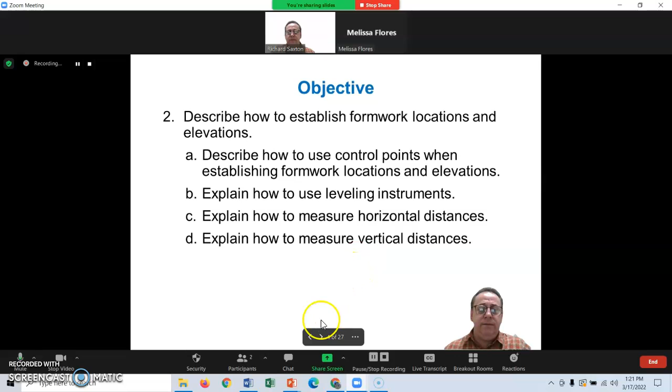We will do a kickoff activity and review the foundation plan from a set of the plans from the Wilhelmina house.

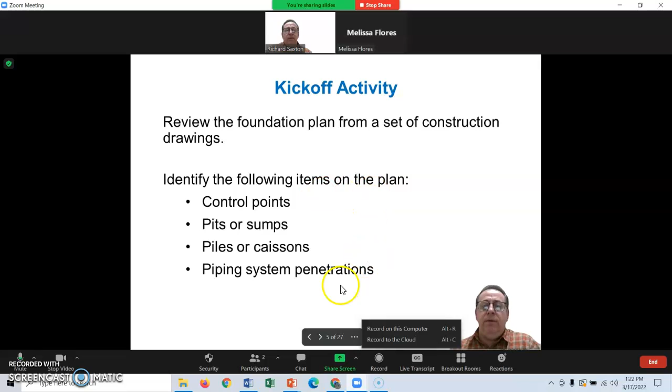Identify the following items on the plan: the control points, pits or sumps, piles or caissons, and piping system penetrations.

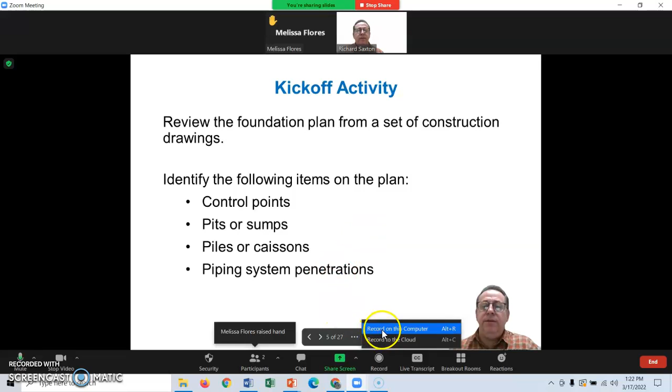Preparing for foundation work. For a typical foundation, once the structure design is complete, the job site must be laid out and the building lines established by surveying methods.

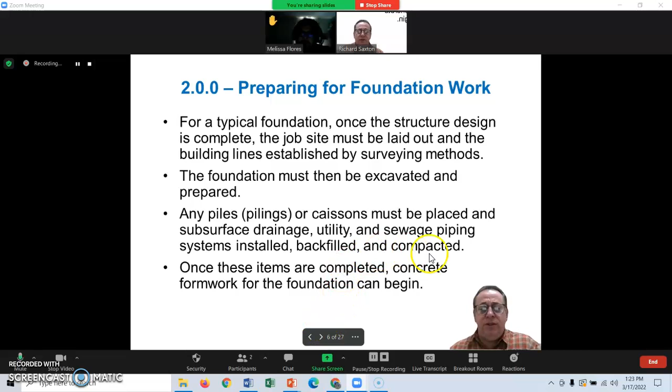The foundation must then be excavated and prepared. Any piles, pilings, or caissons must be placed, subsurface drainage, utility, and sewage piping systems installed, backfilled, and compacted. Once these items are complete, concrete formwork for the foundation can begin. So you have to put the infrastructure in before you start forming up for the concrete.

Foundation concrete formwork. Concrete formwork for the foundation is installed in the following sequence.

Forms for any interior pits are installed first along with the reinforcing steel. Second, the structure footing forms are installed with reinforcing steel, along with any required conduit or piping and any embedded items such as castings for machinery bases, sumps, and manholes.

Any foundation walls, if required, are installed along with reinforcing and any required conduit and piping. The forms for the concrete foundation slab over the footings or foundation walls are installed along with any required reinforcement steel.

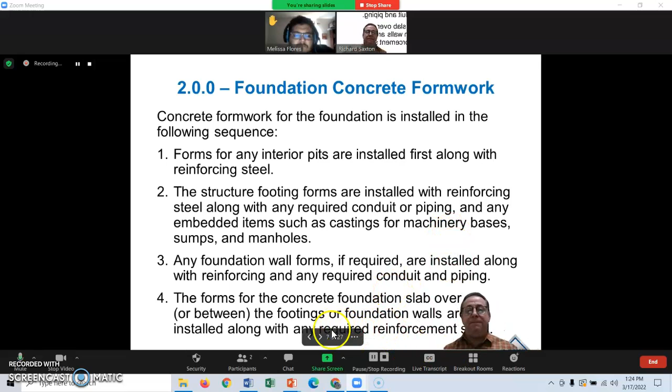Control points. Site layout involves establishing a network of control points that serve as a common reference for all construction on a site. In most states, any layout work that establishes legal property lines or boundaries must be done by a registered surveyor.

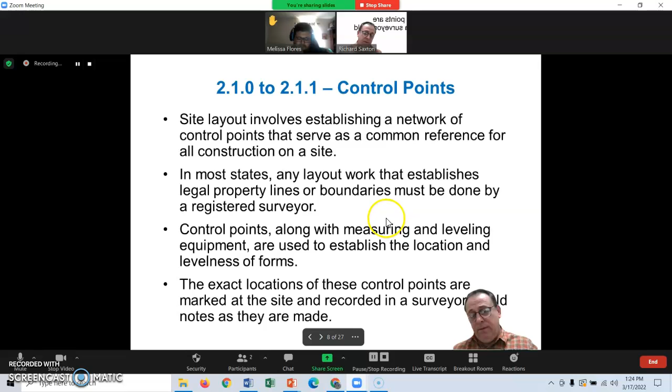Control points, along with measuring and leveling equipment, are used to establish the location and levelness of forms, like we talked about yesterday, using a water level or a laser level to form up your house footprint. The exact locations of these control points are marked at the site and recorded in surveyors' field notes as they are made.

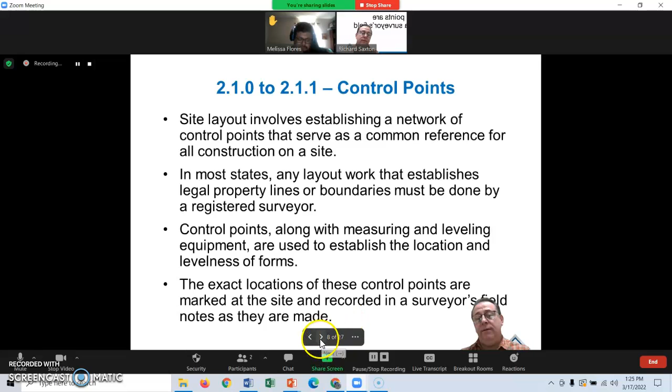Categories of control points. There are three basic categories of control points: the primary, the secondary, and the building layout or working point.

The primary can be located and marked on many kinds of permanent and immovable objects. When no suitable permanent object is available, iron stakes driven into the ground or a concrete monument can be used. Like I mentioned yesterday, for the DOT, they have those concrete slabs with RW written on top, which stands for right of way. So a concrete monument dug and placed into the ground can be used.

These points are typically established by a registered surveyor. Secondary control points are located by the contractor's field crew within the job site to aid in the construction of the individual structures on site. Building layout or working points are usually located by the contractor's field crew with reference to the secondary control point.

These are points from which a measurement of construction can be taken. So if you build part of your house and you're blocking the view from the secondary point, you can use another building layout or working point to set up a new measurement.

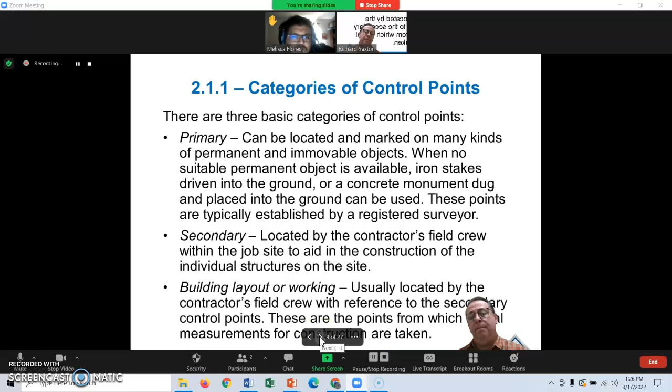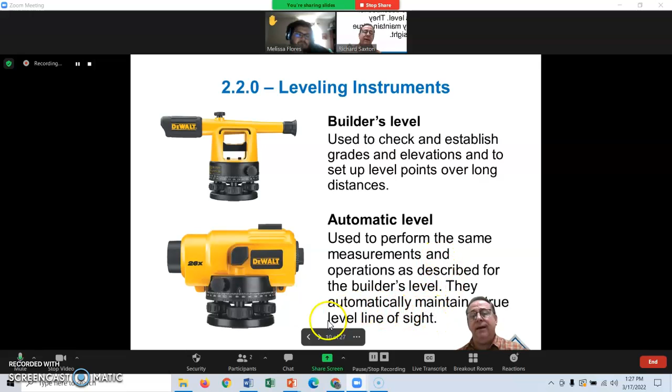Then an automatic level is used to perform the same measurement and operates similarly to the builder's level. They automatically maintain a true level line of sight, and are mounted on the tripod.

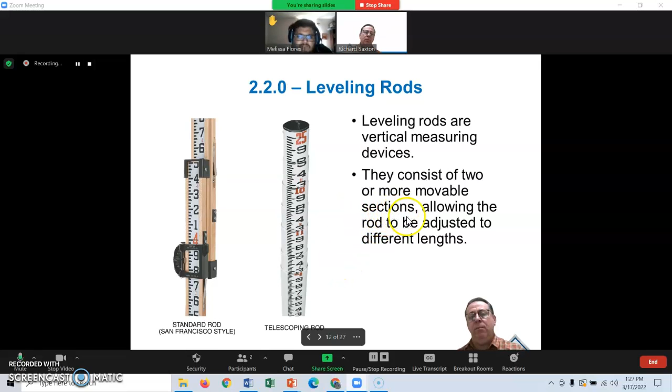Leveling rods come in a telescoping type and the standard wooden type that slides back and forth. They consist of two or more movable sections, allowing the rod to be adjusted to different lengths.

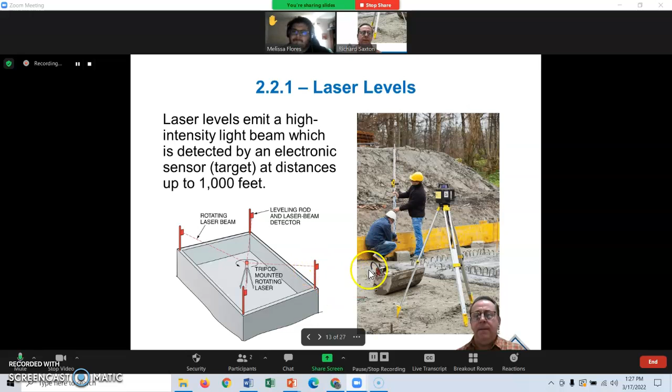Horizontal distances: measuring horizontal distances across level ground requires two people. The distance across the ground is simply measured with a tape.

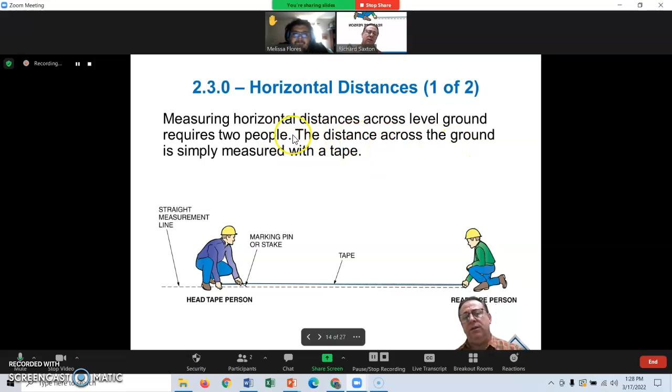Horizontal distances on a slope require a series of steps to measure across the slope. This is called breaking the tape.

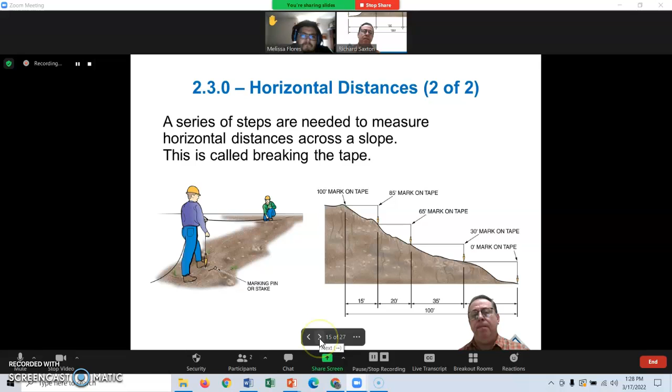Measuring vertical distances or elevations is called differential leveling. Vertical distances can be measured using a builder's level and a leveling rod.

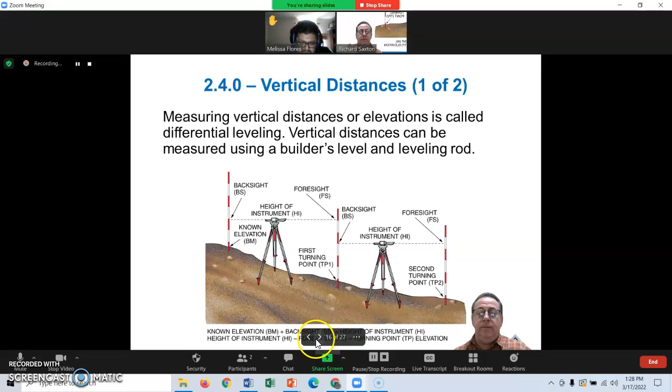The bottom of the rod must be placed in the proper location and held vertically so the instrument person can see it through the transit. The instrument person reads the rod through the builder's level telescope.

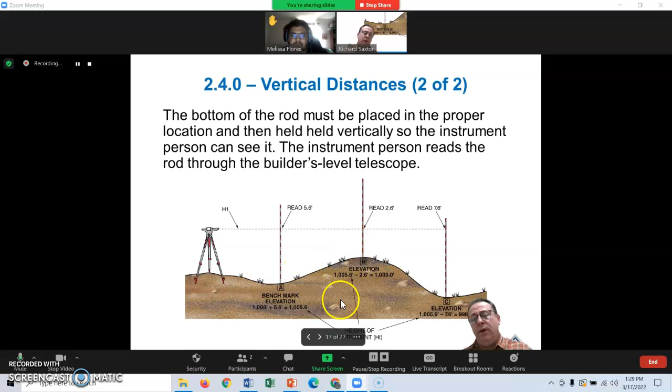Wrap-up activity: review the manufacturer's instructions for using a leveling instrument. We'll have that opportunity next week. Identify the recommended steps for canceling measuring errors.

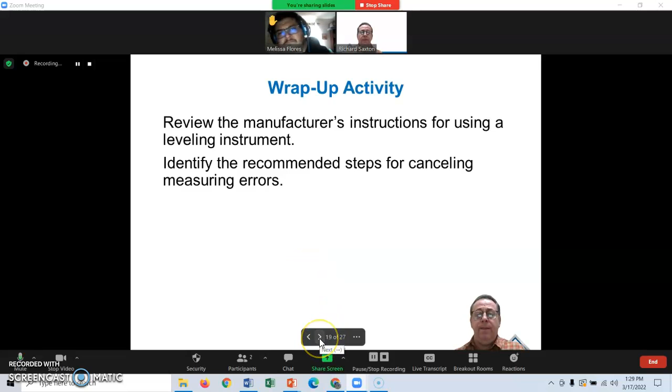Section 2 review questions. Removal of forms after concrete has cured is referred to as B, stripping.

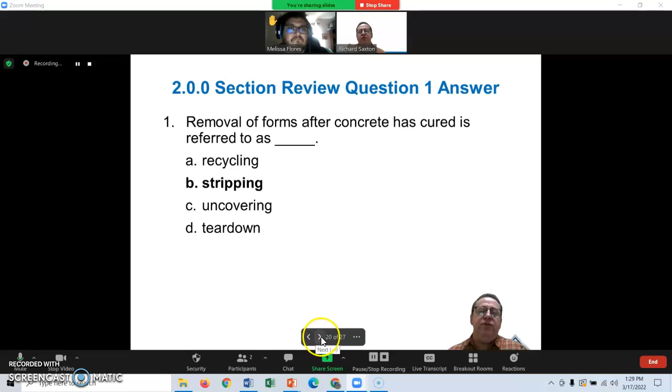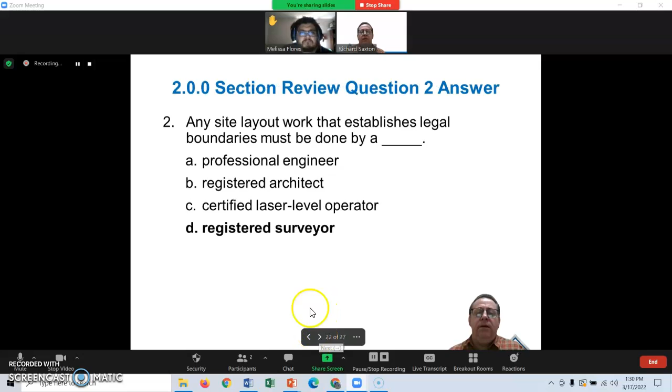Any site layout work that establishes legal boundaries must be done by D, a registered surveyor.

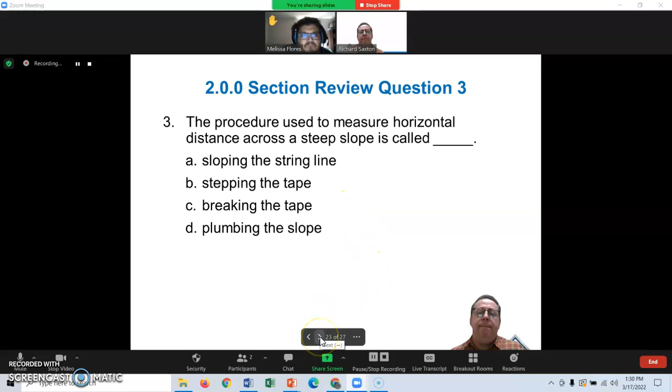The procedure used to measure horizontal distance across a steep slope is called breaking the tape.

To calculate the elevation of the first turning point, subtract the FS from the HI.

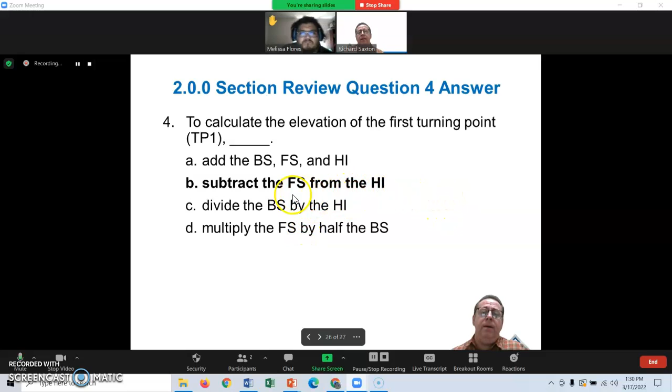That ends the PowerPoint presentation for Section 2, Foundations and Slabs on Grade.